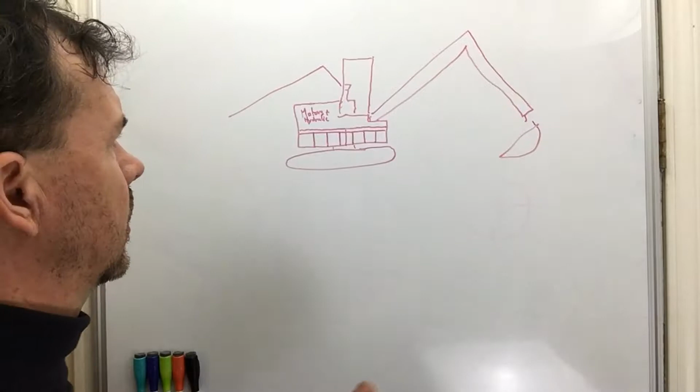Here's what I think is an important adaptation. So number one, the cord can be a self-retracting cord that comes out. This is currently not in place. So there can be a self-retracting cord with 200 feet of

thick, both 110 and 220 power. So this would be the optimal system where you just have an adapter at the end, a smart charging port here that gauges the voltage and can feed the system.

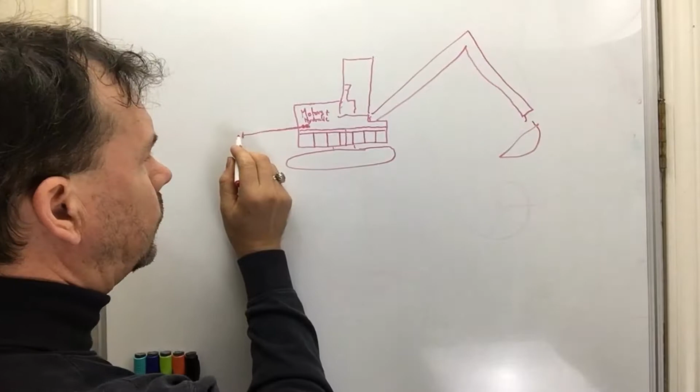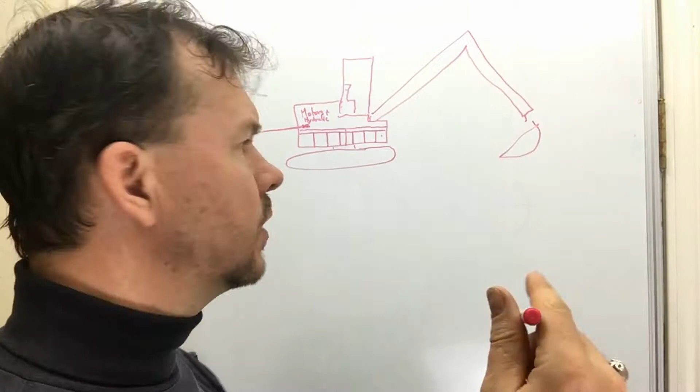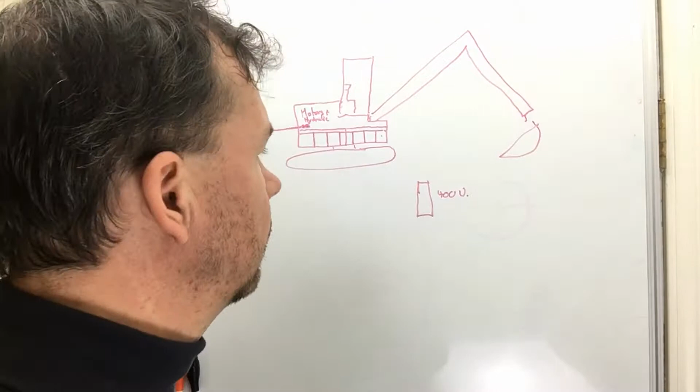Now, the charging protocol needs to charge each battery independently in order so that you have a fully, so the batteries would have the full charge of the electric, which might be around 400 volts. I think that's the process that Takeuchi has gone, is let's say 400 volts. So each battery would generate 400 volts for, let's say, 20 minutes, 30 minutes, whatever. We'll say 30 minutes. So 400 volts, 30 minutes at the ability to power the entire machine.

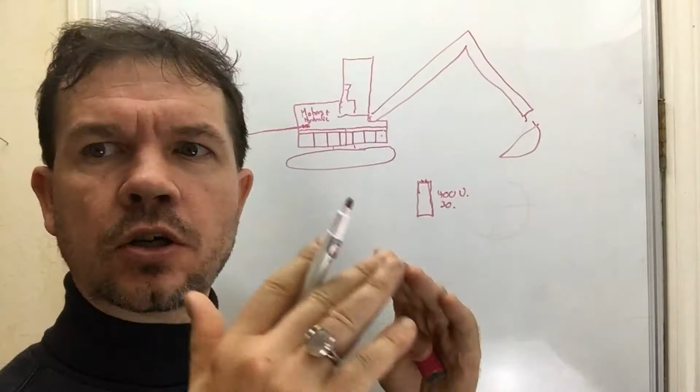Now what this means is that these battery units, which there's a couple of design features I think that are quite valuable here. So you have on the side of the machine two panels that fold down on each side of the machine, because we're trying to get a battery that weighs maybe 80 to 100 pounds, so that one person can lug it, two people can carry it easily.

The batteries each have little built-in storage handles for easy grasping, and they're tough, all-weather batteries.

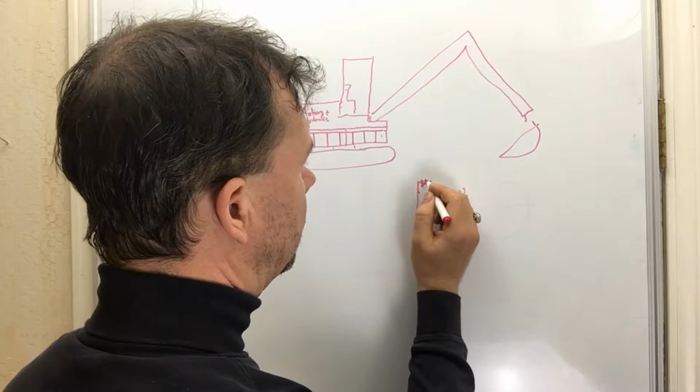Now, the next point is that the holes, the battery connectors, are recessed, so that you basically have a cylinder that's like this, with all plastic and a dust guard right up at the top, with a key handle that's inside. And what this just means is you can't get shocked on a construction site if it's out in the rain. There's no biggie, and

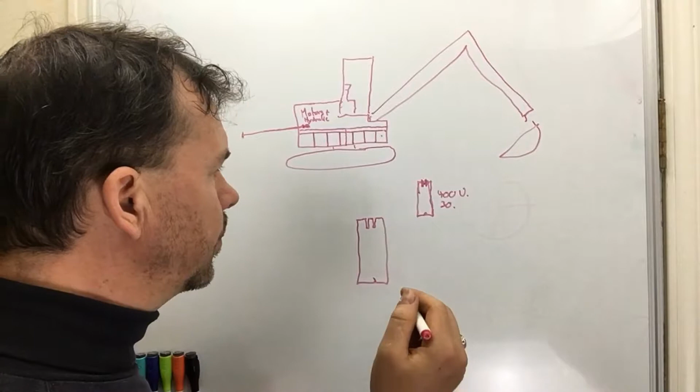These pieces can charge separately. The chargers for each battery, you just have a plug into a house of whatever voltage or a generator, and you just set the battery down vertically right in here. And

This unit, which is designed to be handleable, that I can lift it myself, but very easy with a two-person setup if you want to make it easy, that an individual battery can be moved over to a charger away from the machine if the machine is out in the middle of nowhere and you need to take batteries home in the evening, etc.

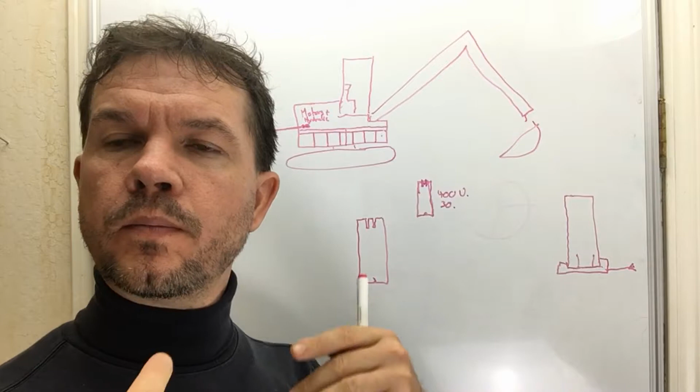This modular unit means that you can run a machine on a single battery, meaning if you lose all power, you need to move the machine, you can keep a spare battery in the truck. You can, in fact, have a charger in your truck so that anytime you're driving, you're charging one of your batteries. This is something that a diesel excavator, and let me just back up here.

I owned a Takeuchi for a number of years, and first of all, I bought a catalytic converter. That cost $1,300. Secondly, I needed to wear earphones all the time because the noise was so bad. Thirdly, there were safety issues with the machine because if the crew said, hey, and I've got it on full throttle, I can't hear them.

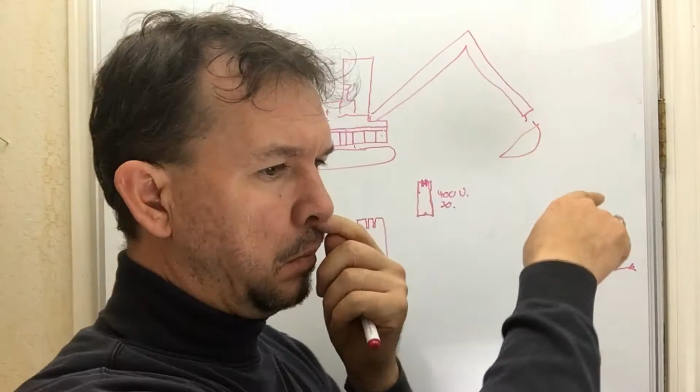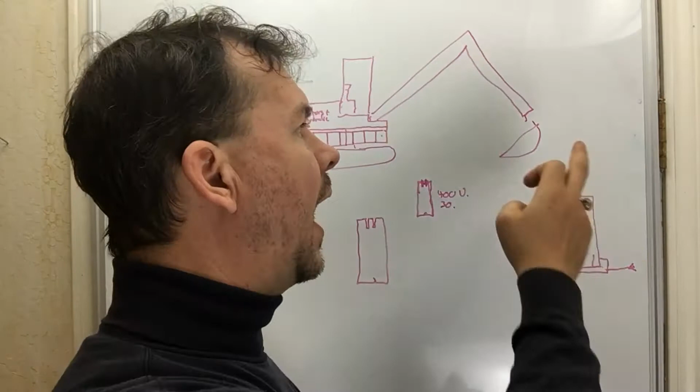So if I'm swinging around with this bucket weighing a ton and someone walks into space or said, hey, and they think I heard them, but I didn't because of this loud diesel noise, they get whacked and killed by a one-ton bucket. If a truck's backing in and doesn't, there's all kinds of situations where the safety basically goes up by 200% if this thing is silent. So 200% increase in safety.

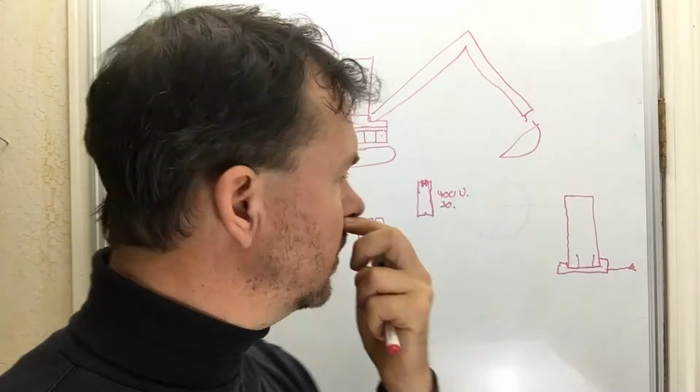Now, even with the catalytic converter, I would get sick at times from the combination of the vibration, the noise, and the constant diesel in high heat. So we now have health improves by 300% on this electric system.

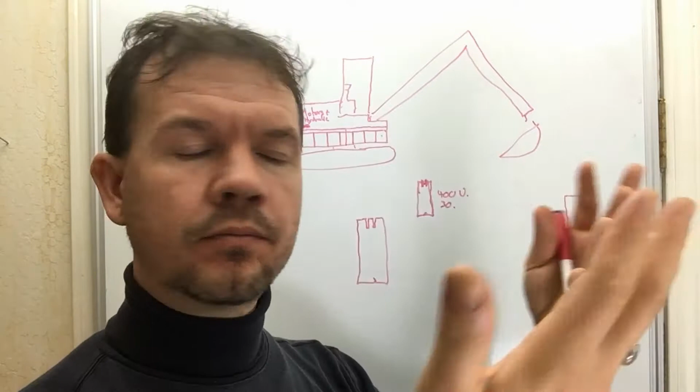Just add in air conditioning for the heat, you've got complete silence, and you've got lower stress, which is a core health concern, because you can't hear anything. And you've got to keep moving to stay efficient, but you know that you're operating in a certain amount of blind spot, and there's an anxiety to that.

So with my gas mask, plus the catalytic converter, plus this, and then having to pull that stuff off to communicate, turn the thing off, that's lost time. You don't have to lose that time, so you've got incredible benefit to electric. And it's so irritating, the noise to the neighbor, of powering on. So as a contractor who's conscientious, I'll use hand laborers because they're silent, but they're not half as efficient as a powerful machine. And so there's just tons of value on the table here.

So just to give a little bit of context, and I'd have one of these if they weren't gas, but so this needs to be invented.

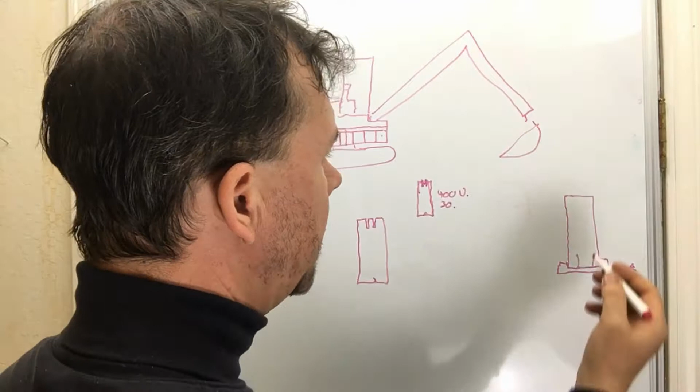So we've got our plug-in charger here, which, these things can be $80 chargers, so you can have 5 or 6 of these chargers separately, and it's the same amount of time it takes to go to a diesel station, fill up 5-gallon buckets, and then you use a 5-gallon bucket worth of diesel every day in an 8-hour day. So you don't fill up the tank with just one diesel. So you've got an easy solution that is 10 times better.

And I don't think we're dealing at higher cost, or if we are, not much. And if there is a higher cost, let's say, for these batteries to be top of the line, add $10,000. So rather than being a $50,000 machine, it's a $60,000 machine. The amount of benefits going to a diesel station, repairs, fueling, and stuff like that, oil, the amount of stuff that you save is easily offset in a lease type situation.

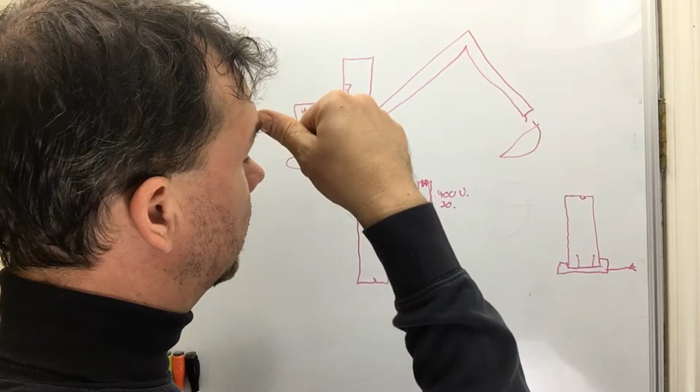So we have these panels that drop down on the sides, and this gives you access to 3 or 4 of these. You pull them out, set them on chargers, or take them back home to set on chargers. Or you swap them out with the already charged batteries that are in your truck.

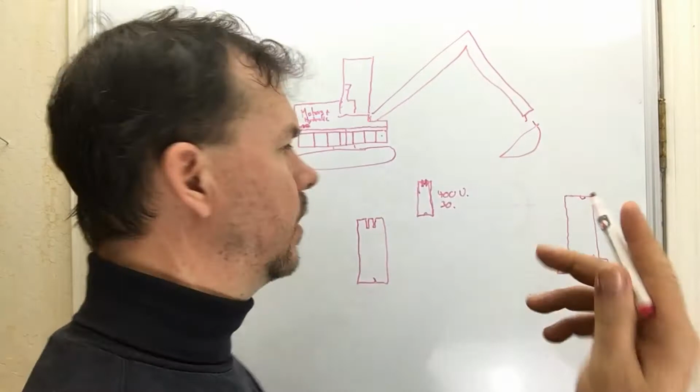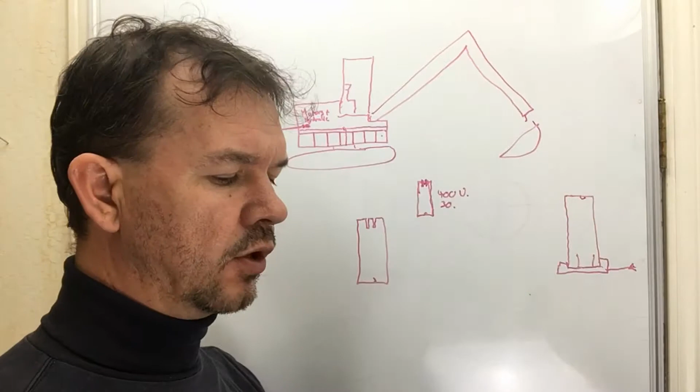Because you can keep a double set if you want, if you're doing a lot of intense work and just want emergency backup. Then you've got the 100 to 200 foot extension cord that's on a giant wheel inside this machine, so that it can't kink, and it's easily maintained. It's spring loaded. It's a great setup. Just kind of like a self-retracting hose where you pull it out and you yank it a bit and then it catches on a barb and stays there.

So this can go into the house at night for some of your charging. The charger fills one fully so that you've got full power, then goes to the next one fully so that you've got full power, then the next one.

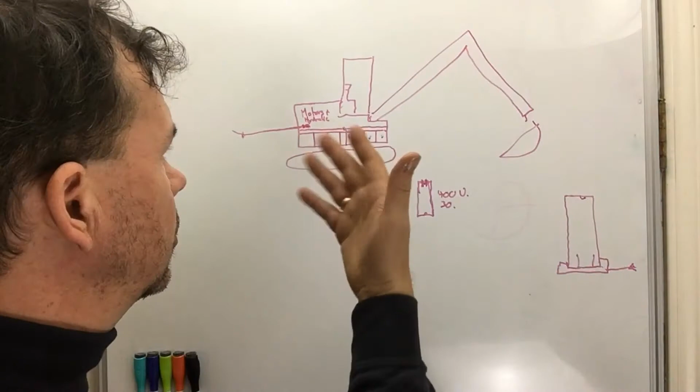And this is important to note because as a contractor, there's many days when I've got lots of stuff to do and I have the machine sitting on site to help. In one day, let's say in one day I need to move 3 large rocks, and that's it. That takes 30 minutes. Now I'm going to leave the machine there because that's my job site, and there's just 30 minutes of stuff, but I need it.

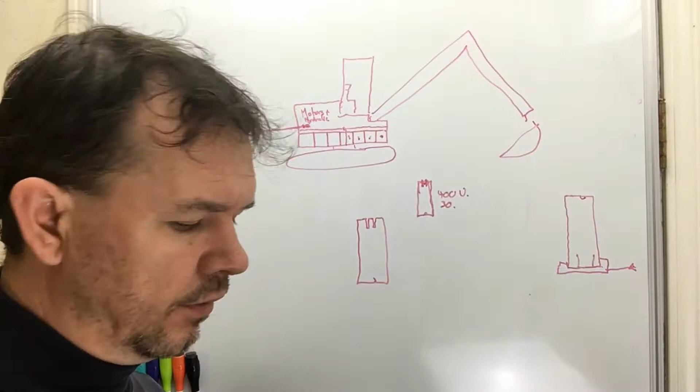And I'm not going to rent something just for 30 minutes, pay them $150 to bring a machine out, then go back just for 30 minutes. So I'm going to have it there for 30 minutes. But what that means is that a single battery would work. So you'll be able to buy this machine empty of batteries and run it just off of its main power, which makes it an incredibly cheap machine because there's no diesel motor and you're buying it completely empty or with one battery just for loading and unloading, and then you plug it in on the site.

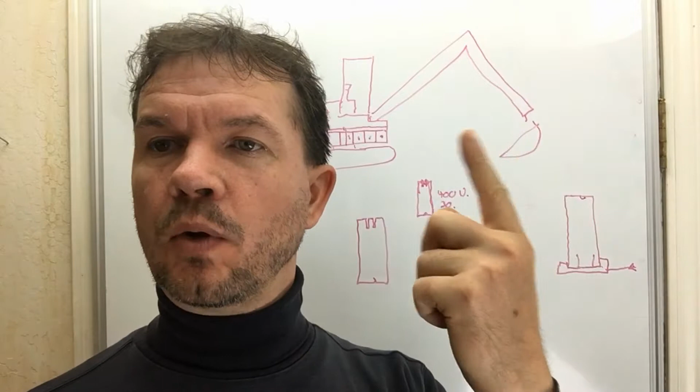So this is version number 1. And you can put 1, 2, 3, 4, 5, 6, 7, 14 different batteries.

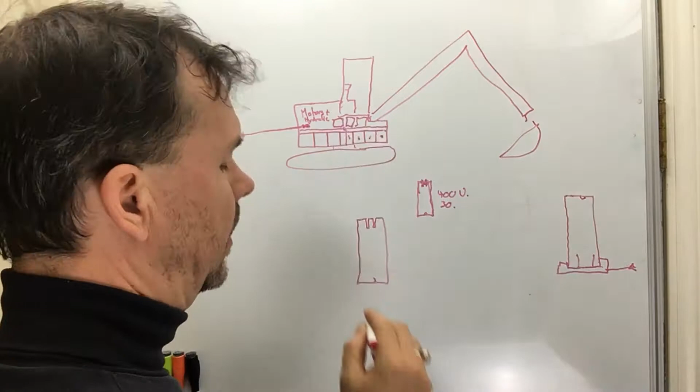You can easily add more, we've got plenty of space up here. I think that we need to have enough to do the calculations to see is it a 30-minute battery or not.

You'll need to be able to run it constantly for 12 hours. I think that would be the goal, that the machine comes with enough ports for batteries that if you loaded every port, it could run continuously for 12 hours. I think that's a good metric for me as a contractor.

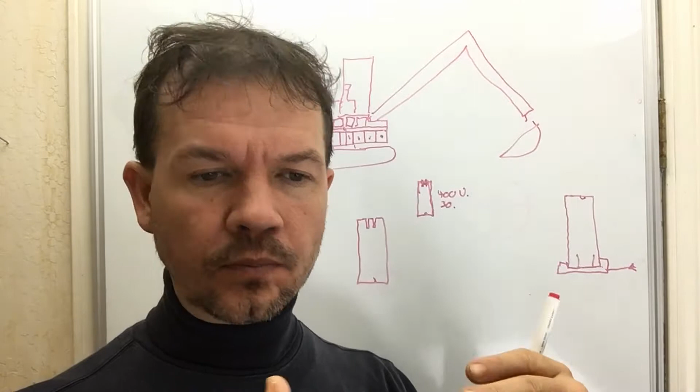Now, knowing that you might want to run a machine 24 hours just means you'd need another backup set of batteries. So you'd run the machine for your 12 hours and then show up with your rig with your spare batteries, swap them all out in a few moments, put those on the charge so that within 12 hours they're all charged, and you've got a 24-hour machine that's running much better than diesel, because diesel gets very hot.

It would not be kind to the neighbors to run something for 12 hours normally, but with electric it's fine. So this is the setup, and inside you have 2 different possibilities.

And actually, as I'm thinking about it, I like this one better. So here would be the battery design. It would have a single hole in the middle, and the connector would be like this.

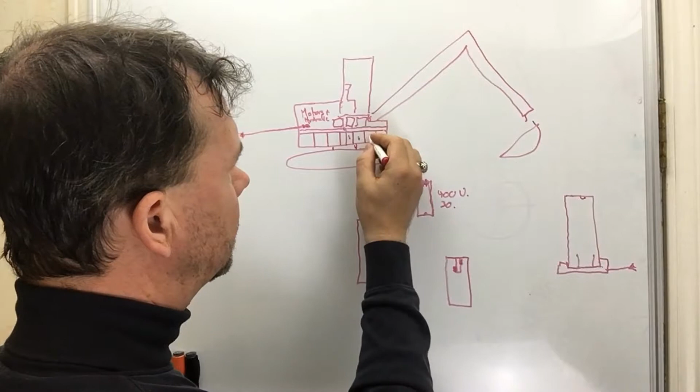So that inside each machine you would then have a single spike that looks a little bit like a headphone jack, with this gap of plastic in between, so that the brush elements here—it would be a brush design.

This would also be replaceable for periodic contact changes because it's inserted, so that this insert could be replaced from time to time just by swiveling it out and screwing a new one in. And then we've got the core piece here that stays brushed and clean every time you pull a battery in and out.

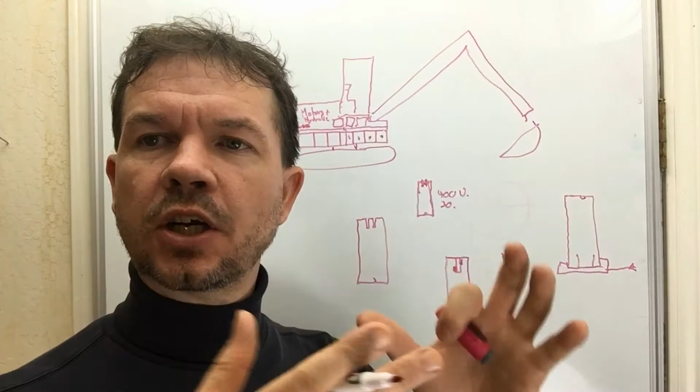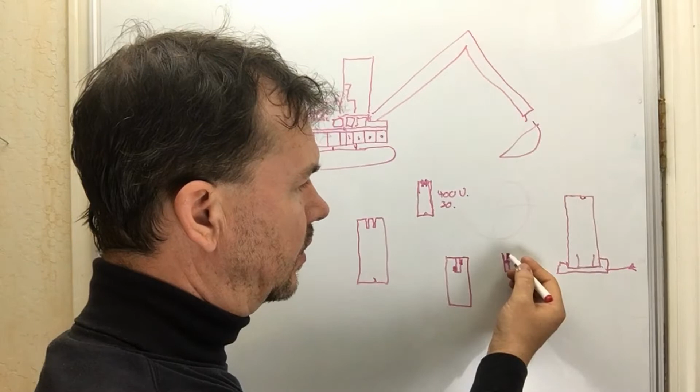It's a little bit like a plumber using those little plumbing copper brushes that keeps the metal contacts very, very clean. And there could easily be a spray that you'd apply on there every 4 to 6 months to keep this point clean. And so inside the machine, you'd have these holes that would be like this.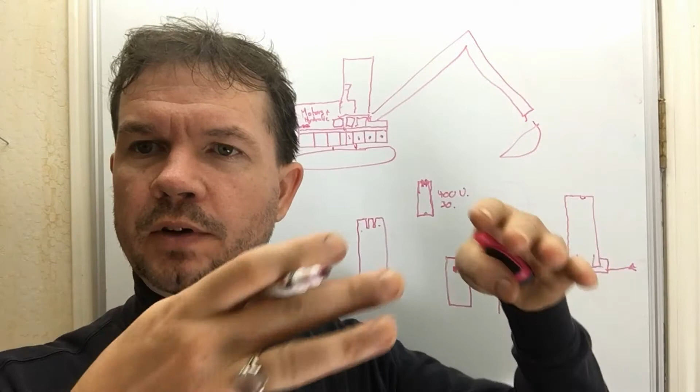And the reason I've switched from a dual point to this is, it's not that the dual point couldn't easily work if you have a top marked on the battery. If you just said top on one side, you'd slide it in and the pins would line up perfectly.

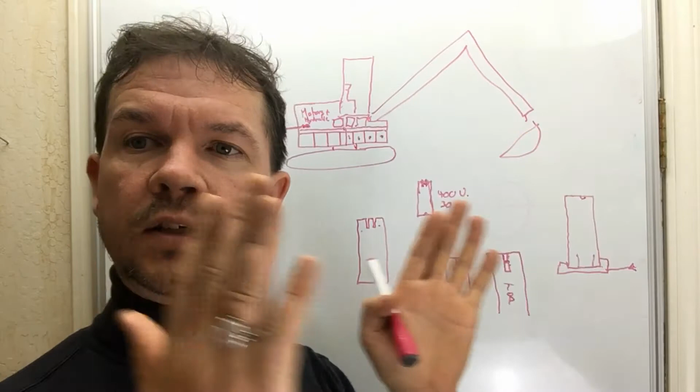But if you want that much more flexibility, having this dual pin in a single hole—this single pin that has 2 contact points in a single hole, much like a headphone jack—you just can't go wrong no matter which way you turn it. Since it's a square hole and a square box, you'd slide it in accurately.

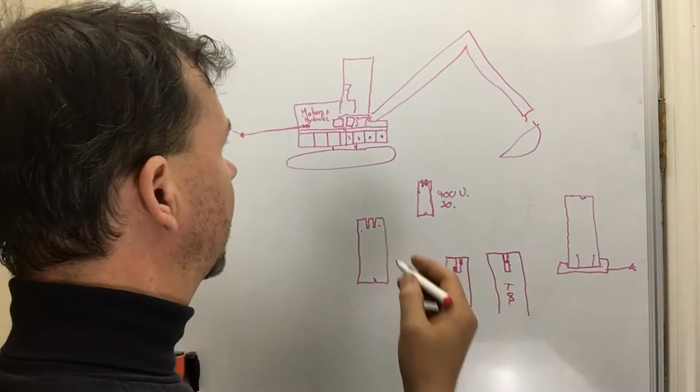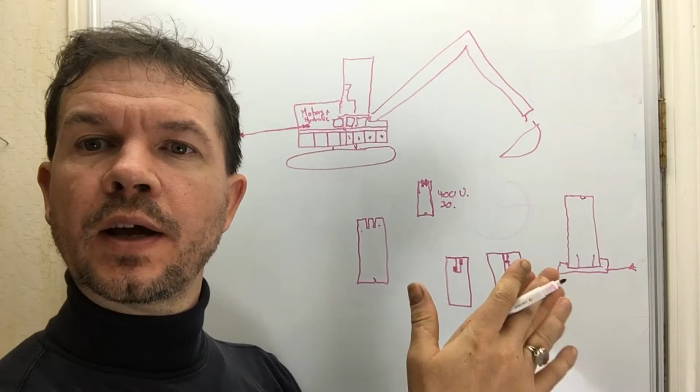Now, all these little things just make it easier for you as a contractor. So you have your easy pull out and exchange. You decide how many batteries you want, how many backup, and how many chargers you want. Do you want 10 different chargers so you can pull 10 of these out and put them in?

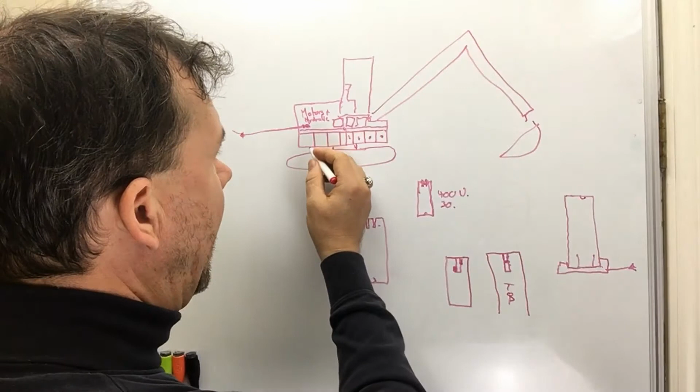And you could even be doing that while you're running the machine. In other words, you could have every other one of these loaded for weight distribution while half of them are on the charger. So this is the idea for a fully electric and fully hydraulic mini excavator, which is wonderful.

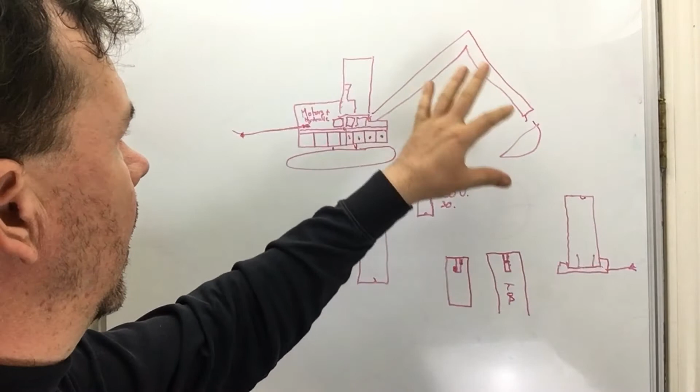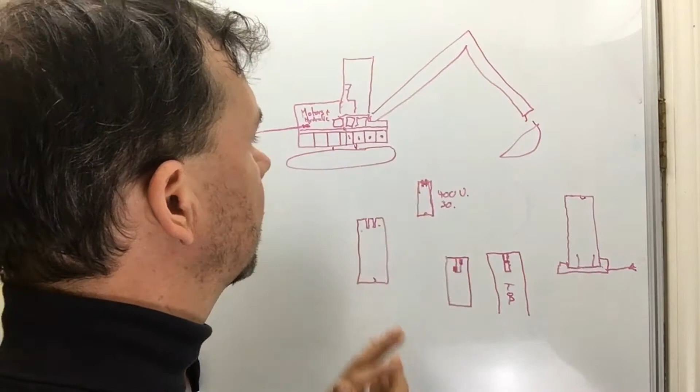You've already got the inverter to turn diesel into electricity for the lights, for the stereo, for the air conditioner. Now the entire thing can be electric.

And when you design this system of pins and batteries, you can now operate, once you've set the volts at a healthy voltage for any size machine, you can set them up so that some are in parallel, so that you could have a large machine, for example, running at 400 volts, and the small machines would run at 200 volts, and each battery is 200 volts.

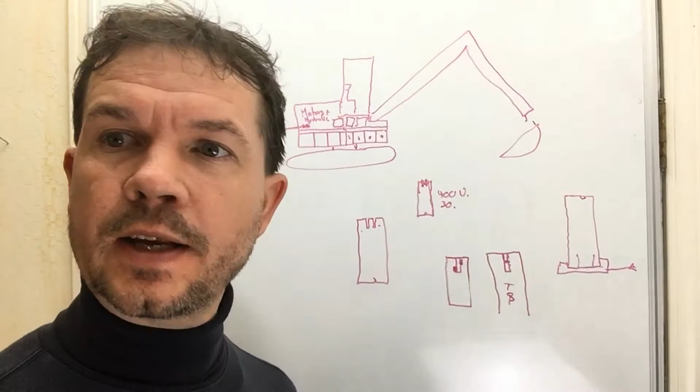And they'd go in parallel when you line them up this way for a larger machine, or could just run at their standard 400 volts for the smaller machines. So this is the idea, and I'd love to see one of these things and buy one.